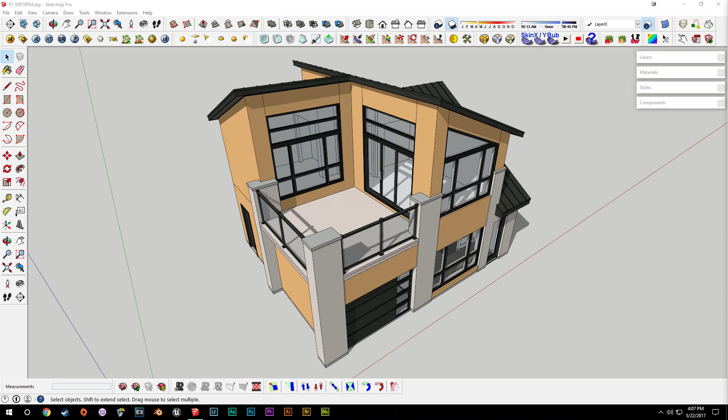Today we're going to shift focus from the first floor and move into the second floor and start working on some of the trim and doors upstairs. We can turn off the roof so we can get a look down into the second floor, and turn on blueprints to see what everything is like down here. We got a bifold, a couple of doors, and some sliding doors for these closets.

So we can probably get to all that today. I guess we can go ahead and add in this wall thing, since that wasn't added in before. It's almost about 2 inches - we'll just say 2 inches either side because it's not even.

Turn off our blueprints and get into the second wall here. Say 2 inches there, 2 inches here. You can just draw a line across the hallway and we'll keep it on the red axis. If you're having trouble getting it to stay on a specific axis, find a spot where it will stay on that axis, hold shift, and it'll stay there. We'll just drag it over here and click.

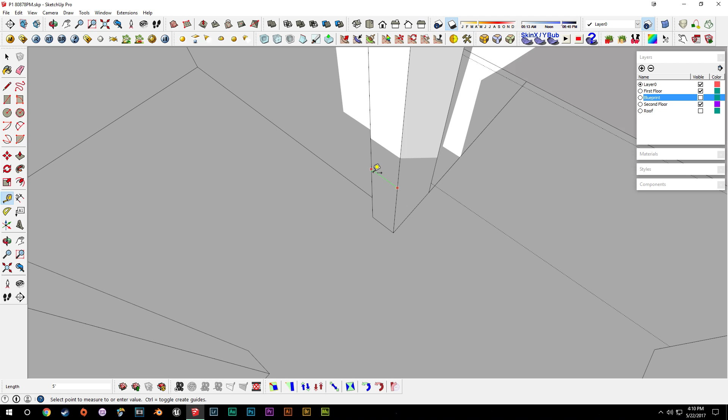I guess we'll get the wall thickness is 5 inches on that side. We'll just check the blueprint, see what it is - that's about 5 inches on this side as well, so I think that'll work.

Get back into the second floor component, draw our guide over 5 inches, and we'll just draw in some rectangles. There we go, delete our guides, erase that line. And now we can pull these lines up.

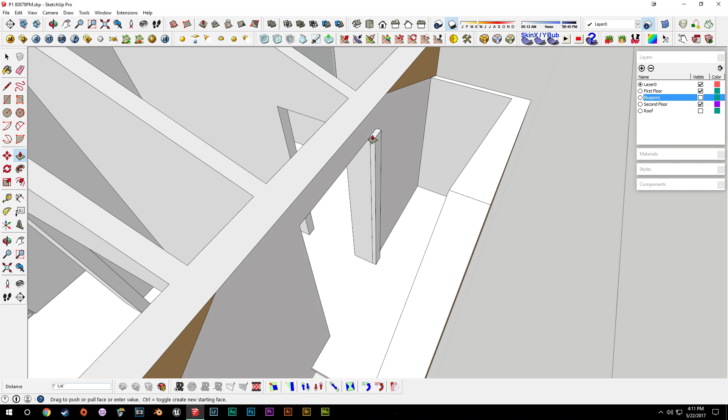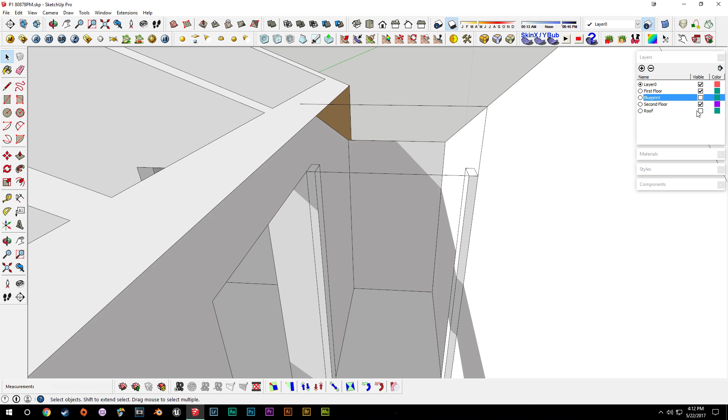We'll bring them up to about door height because we'll probably have a ceiling go across there, or a door top or something like that. We'll drag a line across there, drag a line up to here, drag this one across, hold shift, and drag it to there because this is where the roof meets that wall. If you turn on the roof layer, we can see where the line meets up there. Then we can turn the roof off again.

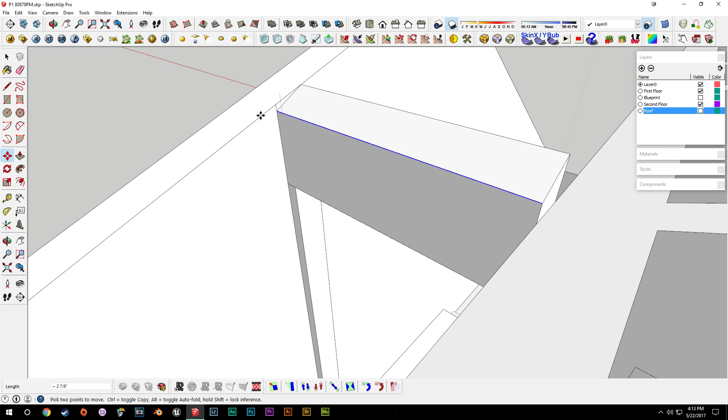We'll just draw another line on the back side here. We could pull it across - we'll have to, I guess we could just do that anyway. Pull it across here like that, and then pull this line down. We'll go to the move tool, hit M for that, and just try to drag it down so that it meets up with this particular face.

Not working out so great. We'll draw a line across here and use that as a reference point. Pull this down now and see if we can get it - there we go, hold shift and get it to match up with that line. You can erase that line now, and that one, and these here. Reverse that face.

We'll actually turn shadows off to increase performance a little bit. Again, we'll look at the blueprints, get out of this component, and just see - it does sort of match up with this particular door frame. So we'll go into here and erase that line there.

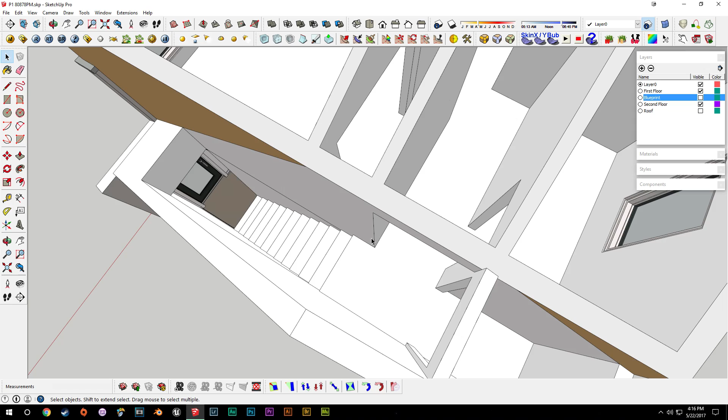Now we can get into doing the baseboards, and it brings up whether or not we'll have the baseboards go down the stairs. I guess we can do something simple - we'll probably just have maybe one panel come up and meet at the top and the bottom. So we can go down to the first floor component and get into the baseboard that's down here.

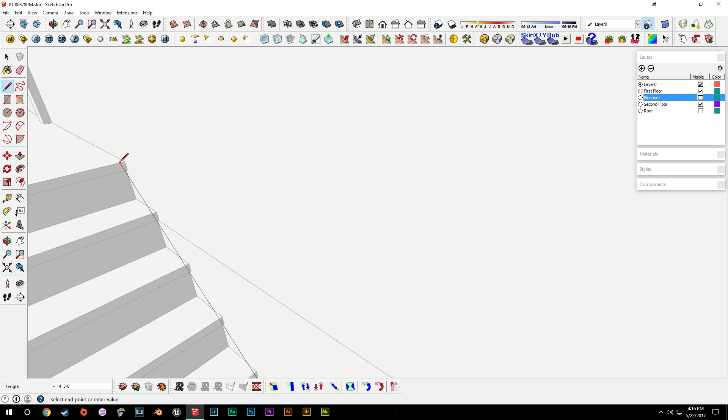We'll just draw a line from step to step, top to bottom here like that, so we have some sort of reference to go on. Now we'll take this line and raise it up so that there's some clearance, maybe even a bit further than that, say 2 inches.

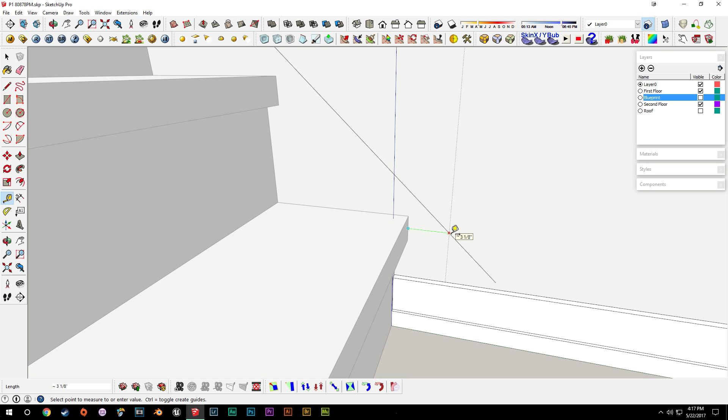Now we can draw a line from here on the green axis, the inference point of this line - we're kind of just extending this line. Bring it down to there and say 3 inches out from the step. Now we can delete this line and take this one and extend it down to here, just so we can get rid of that break in between, because when we pull it out, there will be an extra line that we don't need there.

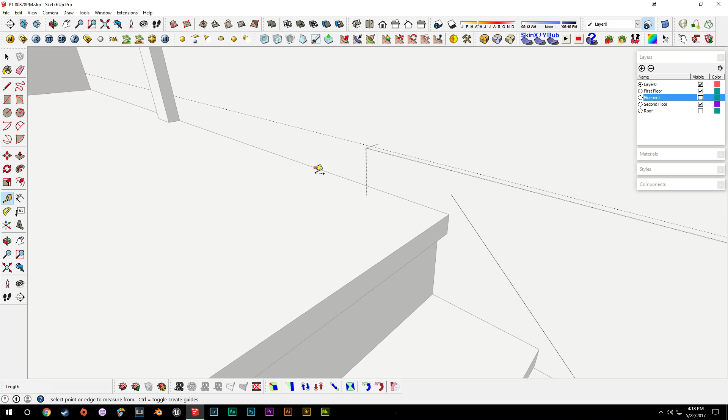And at the top here now, we'll say 4.5 inches, because that's essentially the height of the baseboard up here. So we can just draw this in on that inference point and draw it down from here where it will meet up with the actual baseboard.

You can erase that line and pull this one up to the top. Now we can go down to this part of the baseboard again. We'll go inside the wall and drag down a guide on this axis right to there. That says 9, so we'll say actually 11 inches. Then we can drag this line into here, keep it on the green axis, and pull it up on this guide to right above where the line is going to stop, and drag it up to there so that it will complete that face.

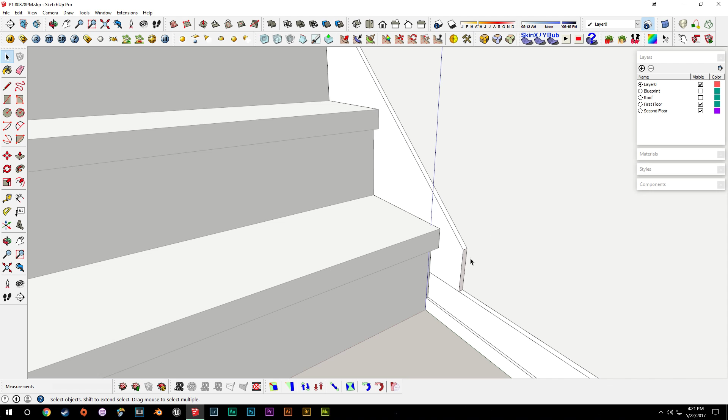We can delete our guides. And we can go back down to here again and just pull this face out the half inch that it is on that part of the step. Then we'll just take this face, say intersect with model. There we go, just so that it sort of combines itself with the stairs. We'll just see what this looks like. I think it looks okay, so we'll probably leave it like that for now.

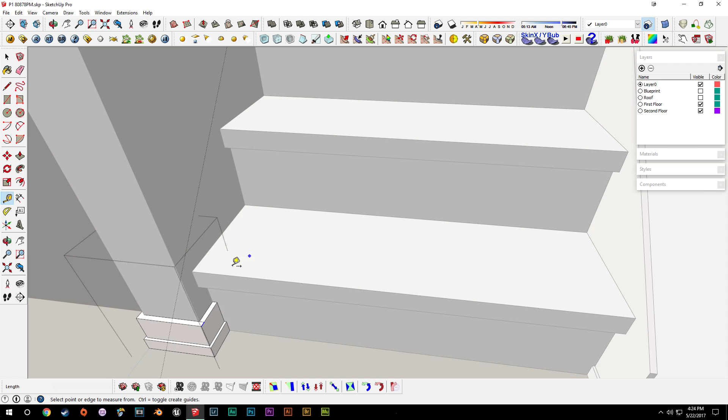And then we can go ahead and do the other side as well. This side is definitely a bit more abrupt, and that's really all we can do about it, but we can draw a line here, and then we can basically just drag this guide over to this wall, so we have an immediate reference point to that side. Just drag a line up to there, then drag it all the way up to here. Try and keep it on this line.

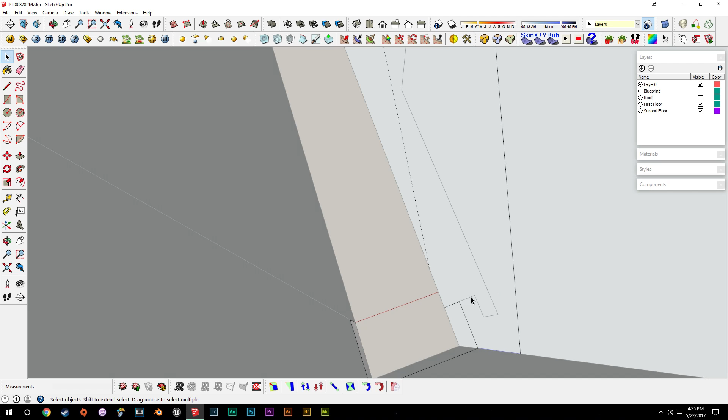And we'll drag another guide up 4.5 as our regular baseboard height. We can drag a line down here. We can go ahead from here on this point, drag this down 11 inches. And we can go inside the wall again. Drag this over to this line where it meets on the green, and then drag this all the way to the top of the stairs, right to where it meets the underside of this, right there.

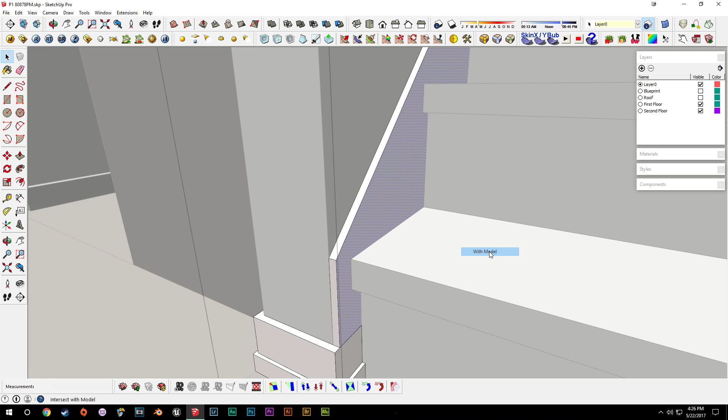I can drag a line straight up, make sure that this all fills in, and then same on this side. We'll pull it out half inch, and then just say intersect face with model so that it wraps around there. There we go, erase our guides, and that'll do it for the stairs for the most part for now, I think. We may come back to this, but I think that'll work.

So now we can get into doing the door frames before we start with the baseboards, and we can start figuring out some of our door frames, and we'll continue the same sort of dimensions that we did downstairs, and those were 3 inches wide, and they came out, I believe, 3/4 inch.

So I guess we'll leave that the way it is, we're not going to bother putting a door frame there. We will, however, put a door frame around this, because this will become a bifold door. If we just turn the blueprints on again, that is a bifold door. And if we just look at how much space we have there, that's 2 inches. So we'll say 3 there, 3 on top, and then we'll just go straight to the wall on that side.

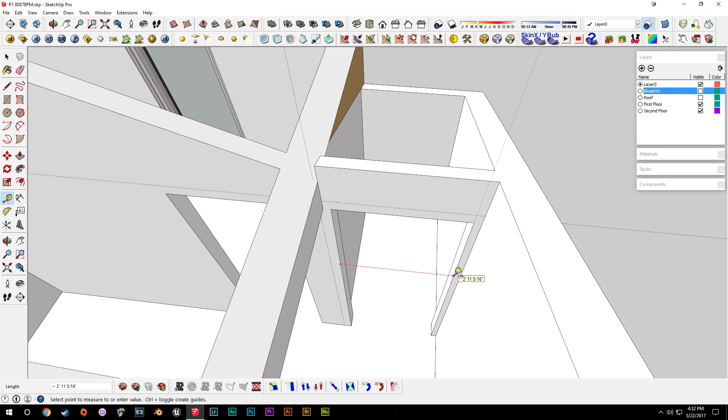In fact, let's just look at our door gap here, 2 feet 11 inches. I don't even think it needs to be that big. What we could do is maybe make this go over 1 inch that way, and then we could just have our door frame go right to the edge there, and then we could bring this out another inch, so that we have 3 inches on that side as well.

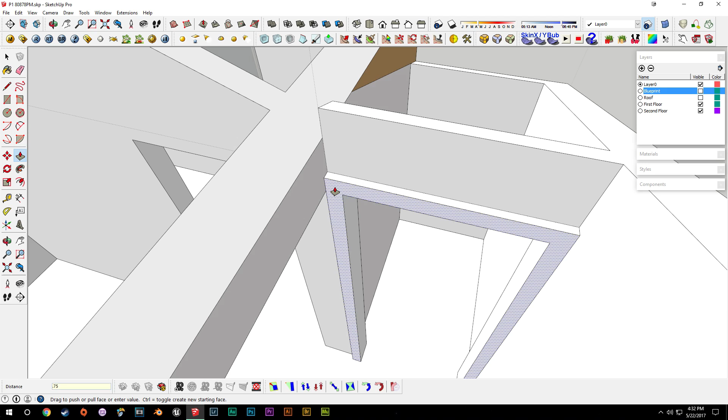We'll just drag a rectangle around here. We can erase that bottom one. Pull this out 0.75 there like that. There we go, and then effectively do the same for the inside as well. Get out of there now, erase our guides, and go back into this.

And we'll just look down at the door frame downstairs. All these came in, it was the door frame itself, so that was 1 inch, and then this came down 1/4 inch, and that went through to both sides. So we'll do the same thing upstairs.

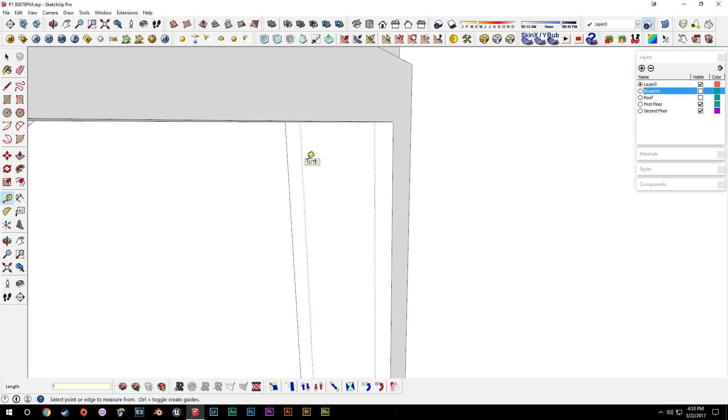So I'll go in here, 1 inch that side, 1 inch this side. Drag our rectangle down to the floor. Pull this over 1/4, 0.25. Same on this side, and the top, but we don't really need to draw guides in because we can just reference those 2 corner points. Pull this down 1/4 inch. There we go, erase the guides now.

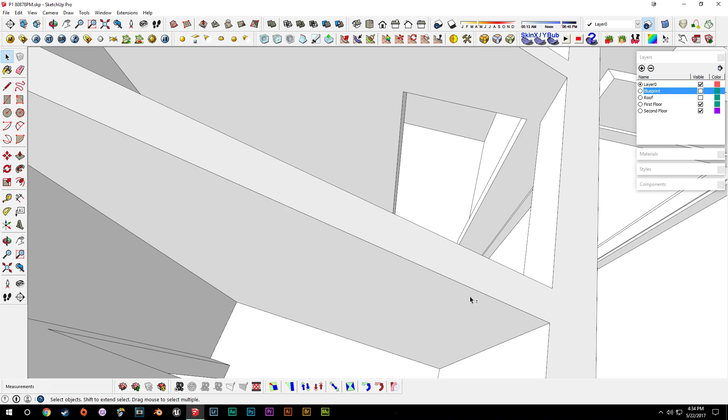And we can leave this gap here as just sort of an archway, we don't need to do anything with that. And then move on to this side, so we'll say 3 inches there. And that actually comes really close to the corner, but I think what we'll do is actually even it up so that it is exactly 3 inches like the other side.

We'll pull this line to there and check what our door gap is, about 2'6". That's okay, we'll reduce that down 1 inch. We'll do the door frame a little different this time, grabbing these 3 lines and using the offset tool to bring them out 3 inches, a different way of going about it, maybe a little faster.

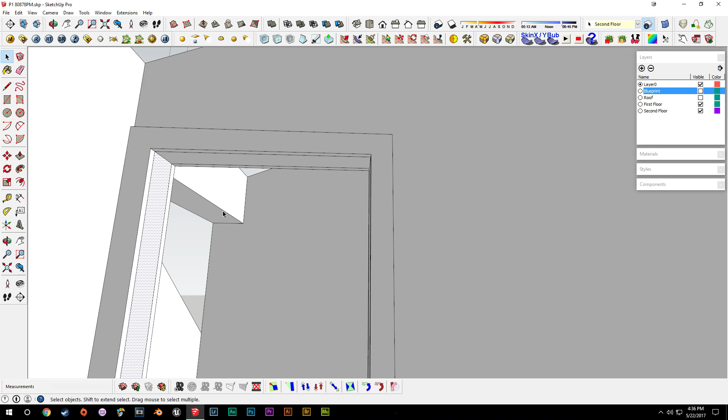Pull this out again, 0.75, and do the same for the inside. Now we'll do our 1 inch thing on the inside here again, drag these in 1 inch. Now we can pull these out a quarter. Erase those guides.

Now we can move into this window frame here, and we'll do the same thing we did last time. Grab these 4 lines and do the offset, 3 inches, pull them out 0.75, and we can just leave it the way it is. 2'7", it's a little bigger.

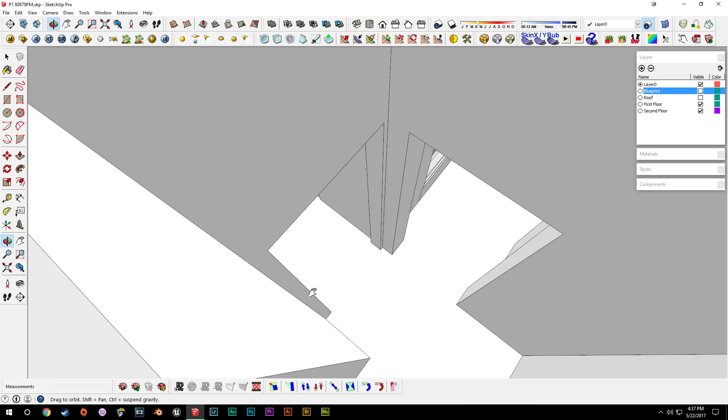2'6". I think what we'll do is standardize some of these door widths so they're a bit easier to place the doors in afterwards. So that's about 7/8, so we'll say exactly 7/8.

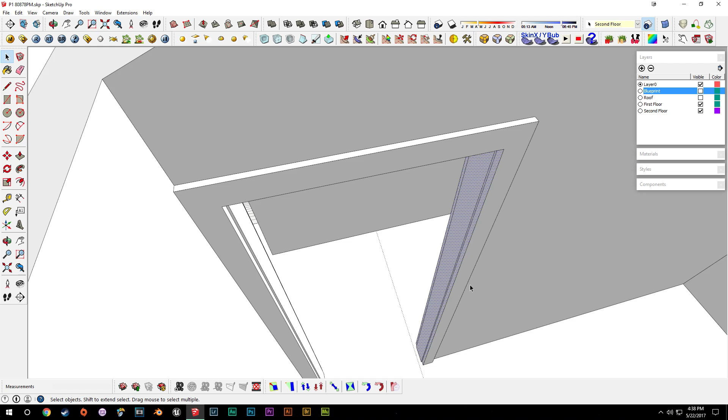So we'll grab these lines here, and rather than pushing and pulling each piece, we can grab our move tool and drag it over 7/8 like that, which reduces the gap down. We'll try to do that for all the main doors so we don't need to keep changing it. That was for the bathroom door.

The larger storage room door here - well, we'll just check the gap actually. The gap was 2'6 1/4, so we'll use that for the bedroom doors.

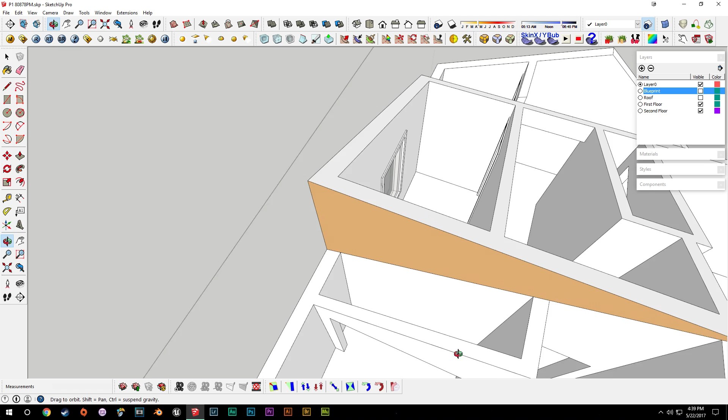We'll draw on our frames first and adjust that afterwards. We'll offset our 3 inches there, pull this out 0.75. This door frame is actually particularly thick, I guess because it's on one of these exterior walls, going across here, so we'll leave it the way it is.

It doesn't particularly matter, it just means there'll be more negative space on one side of the door than the other. We can go in and drag in our rectangles, drag this across, then bring all these out 0.25.

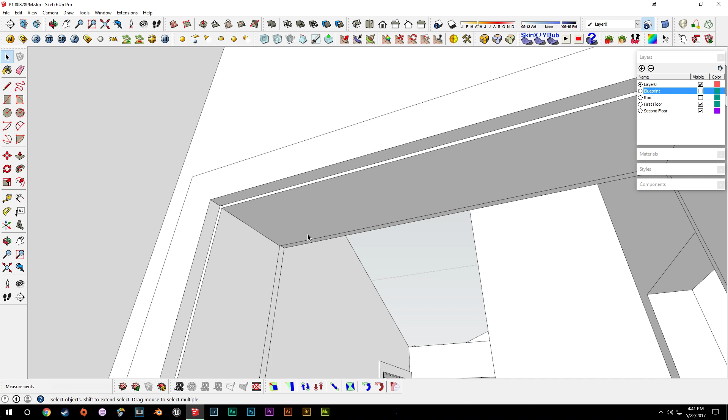We'll do the sides first and then the top so we get that line that's consistent across the top here. Now we can check our gap, and the gap is 2'7" and 1/8.

So we'll try to pick a side to pull it in from - we'll do it from this side. We'll drag it over to 2'6" and 1/4 right there, and that's about 7/8 as well.

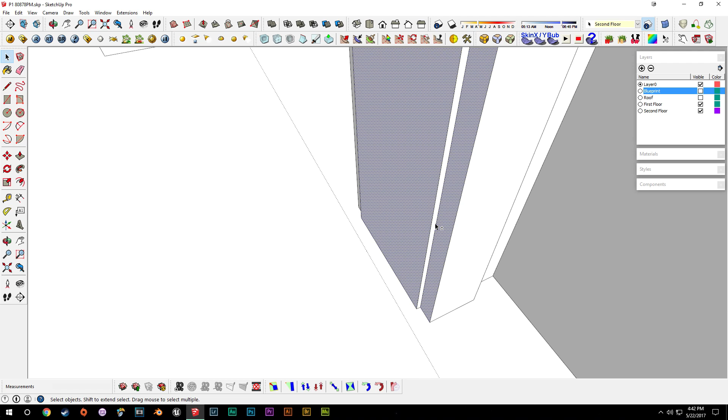So we'll grab all these faces that we got to pull over, select all those, and then pull them over 7/8. We can probably erase this little line here while we're at it, we don't need that - erase that on that side as well. Now that door frame is done.

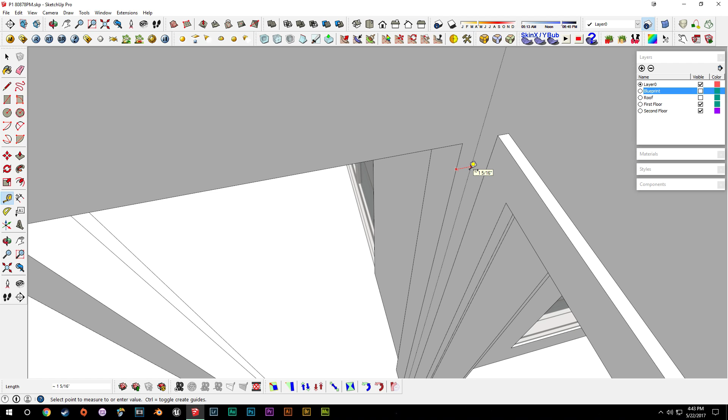Now we can see what's going on with this one. It's our gap here on this side - it's not even 2 inches really. We have about 3 1/4 on this side.

What we can probably do is pull this out 3 inches and then push this in 1/4 inch, pull this side out 1/4 inch. This will all be adjusted afterwards once we finalize the door width, but we'll just leave it like this for now.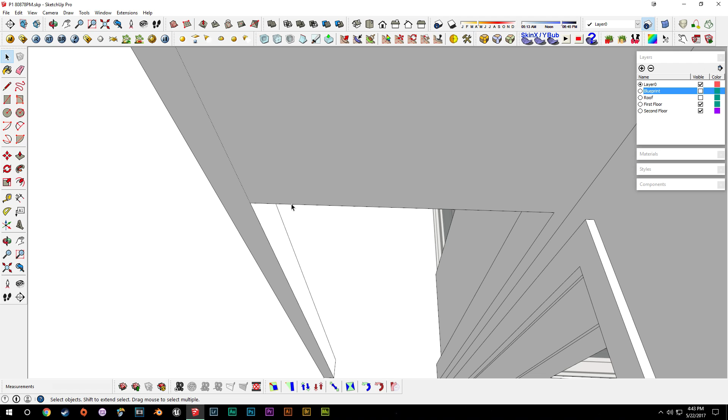So we'll just drag a guide up from here. We don't really need to do any more guides, because everything is up against a wall. Drag this out 0.75 and swap to the inside of the door frame and do the same thing, then start pulling these in 1 inch from either side.

Maybe what we'll do, just to make this door frame equal on both sides, is go into the closet here and drag this down about 1 1/4 inch, which is what we'd need. We just measure this door frame here, it's about 1 3/4 across, so we add another 1 1/4 inch there - we can make that 3 inches.

So we can just see if we can pull this in 1 1/4 inch, say another 1.25 right there. Drag a line across here and delete that, then we'll need to draw that down to the floor. Drag it across to there and drag it back up again, so that fills in.

I can erase that line and this guide, then drag this line down both sides so that it cuts off this one to there, and then to there. For this one we'll push it into the wall to there and then to there, because it's getting caught up on that door frame piece.

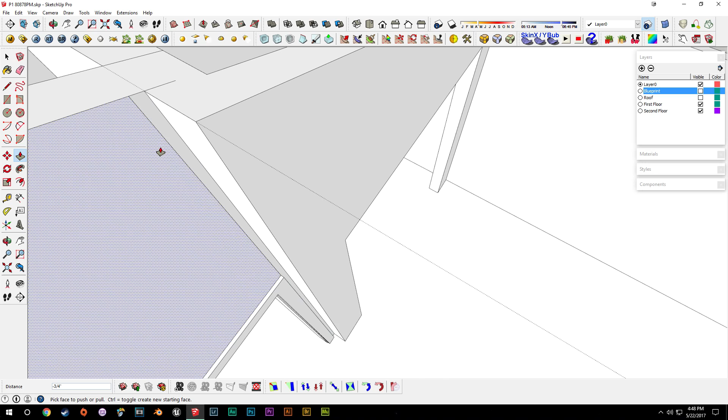We'll do the same on this side. Draw a line out to here, draw that to the floor, then push this in and then in again. Erase that and these guides. There we go. Normally this sort of unequal door frame thing isn't necessarily a problem.

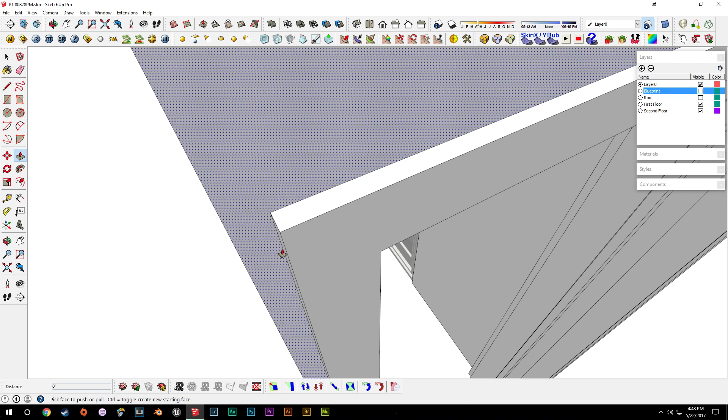But when you're rounding this corner, it's definitely more visible that it's narrower on that side than this side. So just for visual purposes, not a big deal, but to keep it consistent, move this in. Grab all these faces like before, and push this back to the wall. Grab the move tool and pull it back right to the corner. It's about 1 3/16, but that's fine.

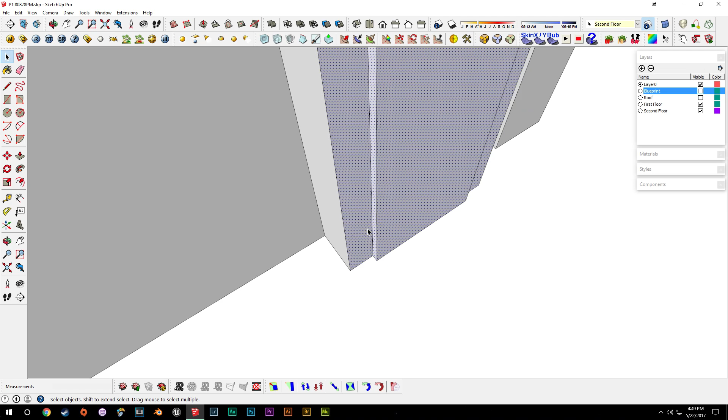Now we can grab all of these pieces - there's no back, so we don't need to worry about that. Just grab these faces and pull them out 1.25. There we go. Check this measurement now - it's about 3 inches. That's good. And we'll just check our gap.

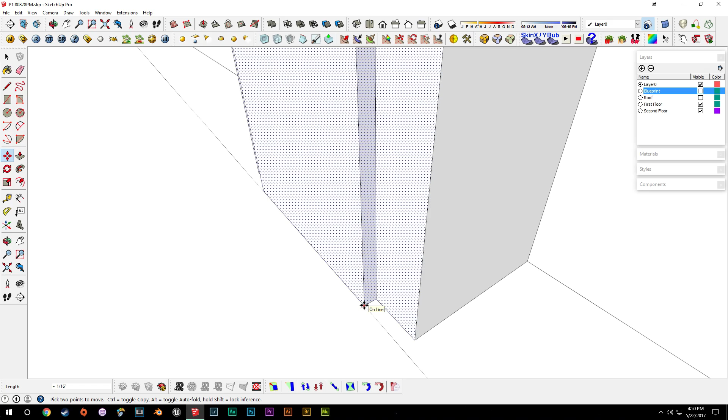With our 2'6" and 1/4 measurement, it goes to about there, so it's actually a little bit tighter than some of the other doors. What we can do is grab all these front faces and pull them back to there - it's only 1/16 inch, so it's less visible than before. Rather than cutting the closet up again, it's pretty close, so we can leave it like that. That's also on the inside, so it's less visible.

Now we can move on to the interior window frames here. Let's grab these 4 lines, go an offset 3 inches, then pull them out our regular 0.75. We can do the same for this door slash window frame combo - pull that out 3 inches. There we go, that's that one.

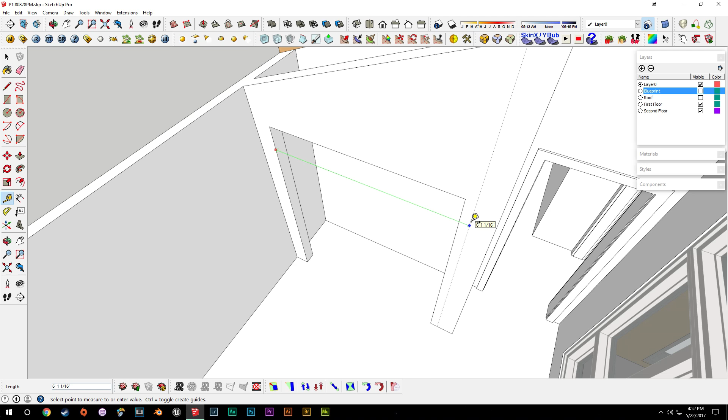Now we can move on to the closet, and we'll want to make sure both of these closets are the same width. One's 5'9" and 7/8, this one is actually 5'9" and 13/16. So how about we just say 5'10", and we'll do that for both of them. That way when we get into doing the doors, we can just copy and paste rather than fudging the dimensions around again.

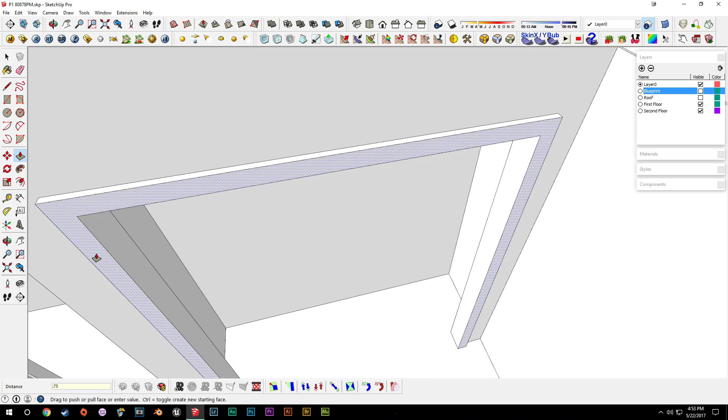I'll pull this one from this direction, 5'10". Pull that over to there, delete that guide, and now we can do the frames. Grab this here, 0.75. We probably won't bother with the insides for now, although we may end up doing baseboards for the inside, so I guess we will just do quick frames here, just in case we decide to do something with that later on. It's already done, and we'll do our same 1-inch thing here for these as well.

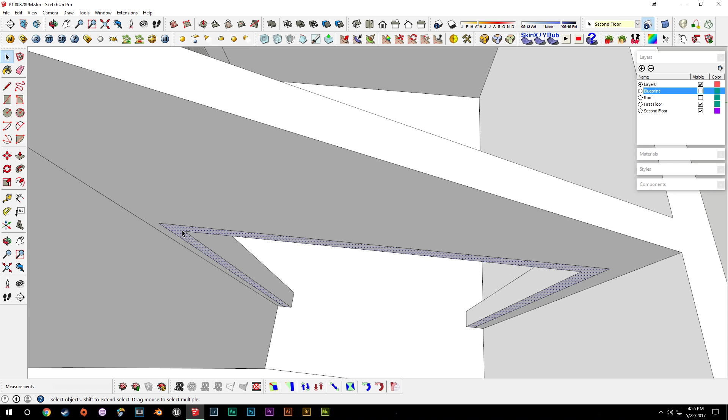In retrospect, if you have a lot of door frames and things throughout your model, you could probably just make those into groups or components. Especially with a lot of them being different dimensions and having to be reworked, it's probably just as well that we made the frames on them while we were changing their dimensions.

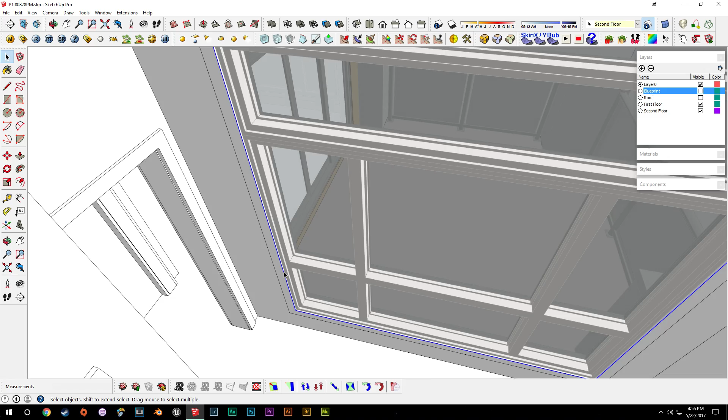Now we just have this window to do. We'll grab these 4 lines and then we can start moving into the baseboards. Pull this out our 3 inches. So that's all the windows and door frames complete, and now we can move into doing the baseboards.

We can start at the top of the stairs with the same pattern that we have downstairs. We'll click into the second floor here, drag our guide up the 4.5 inches to the top of that, then our 1.5 inches to there, and then trace this line out here that comes down to there, goes down 3 inches, then comes out 1/4, then goes to the floor, and there we go.

That's that piece. So now we can delete our guides, click this, we'll group it - doesn't really matter what the number is - and then just pull it across to here, like that. And there we go, that's that first piece done.

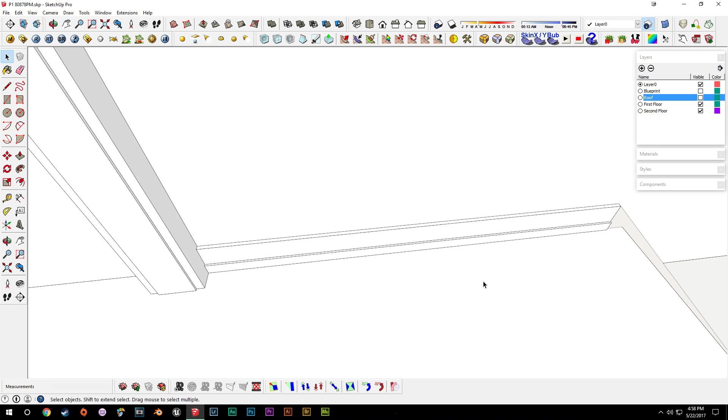Now we can move into doing the inside here. Like we did downstairs, rather than making this into a component, we can just grab the end piece and go up to make group.

With the group function, you don't need to keep hitting make unique on it. You can just copy and paste it, and it doesn't mimic other groups. So we'll draw a line around the base here, grab this piece, and wrap it around our line like that. There we go.

Push that to there. Go in here and pull this one across like that. Go ahead and rotate this one 90 degrees, and put it there.

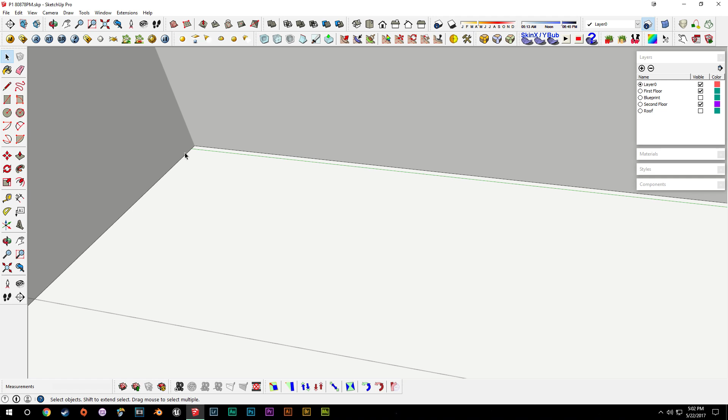This one goes on 2 walls, so we'll draw a line in like that. Grab these 2 lines, follow me tool, and click the face. There we go.

We've got a short one to do here. We can do 180 degrees, paste it right in the corner, pull that across. It's a very short one, but still needs to be done.

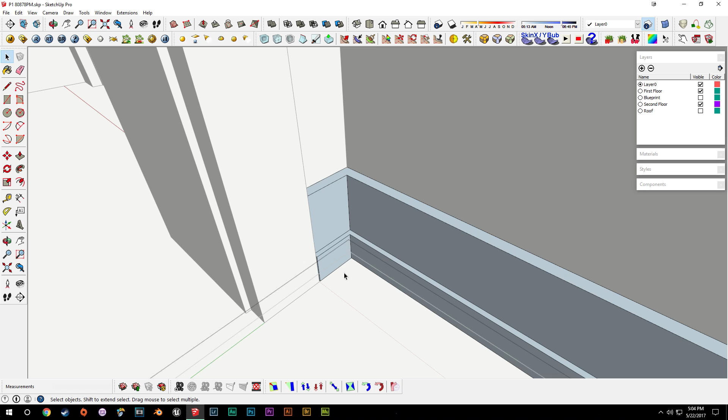Grab all our lines, and with the follow me tool, click our face. Of course it wrapped the wrong face, but that's not a huge problem. Just triple click everything and reverse our faces with the hotkey. If you don't have a hotkey mapped, you can right click and say reverse faces.

Move over to this one. And if you'd like to set up a hotkey, you can do that as well. Go up to preferences, then shortcuts, and scroll down to where it says edit item reverse face.

You may need to have the object selected and the function available before you can see it in this list. Scroll down to reverse face and you can assign or add a shortcut. You can add multiple shortcuts for specific things if you want. Then just hit OK. I'll hit cancel here because I already have it assigned.

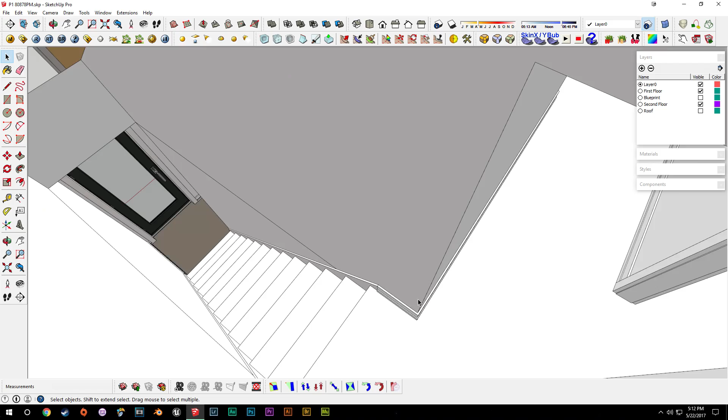We can pop out of this, drag that one to there, and start working on this one. Reverse those faces, wrap it around to the top of the stairs there, and grab these 3 lines. I can click that with our follow me tool and it wraps around there perfectly. There we go, so that does it for the baseboards.

So now we can start dragging some doors up. We'll go hide the second floor. We have a lot of these baseboard pieces that are not part of the second floor yet, but we can deal with that after.

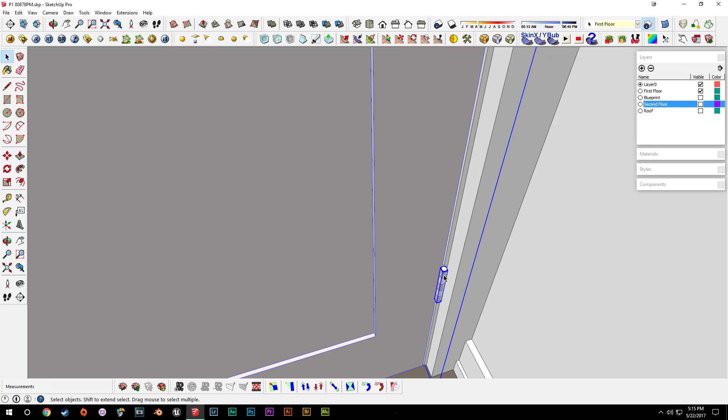We'll grab our storage door and make sure we have the pins and hinges selected for the top and bottom. We'll make a group of this for now, a temporary group, copy it, enable our second floor again, and paste this here.

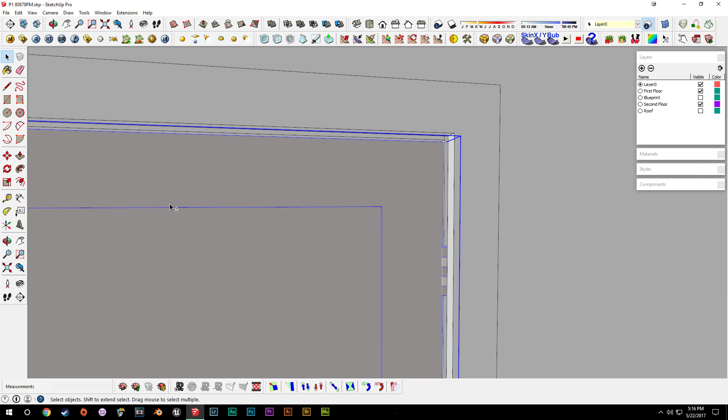Then we can drag them right into the corner here of this molding piece, and drag them over 1/8 and down 1/8. That should fit them in there relatively well.

I'll actually have to push this one over a little bit further so it matches up better. Now one thing we remembered to do downstairs, since it was still fairly new, but forgot upstairs, was to adjust the heights of the doors.

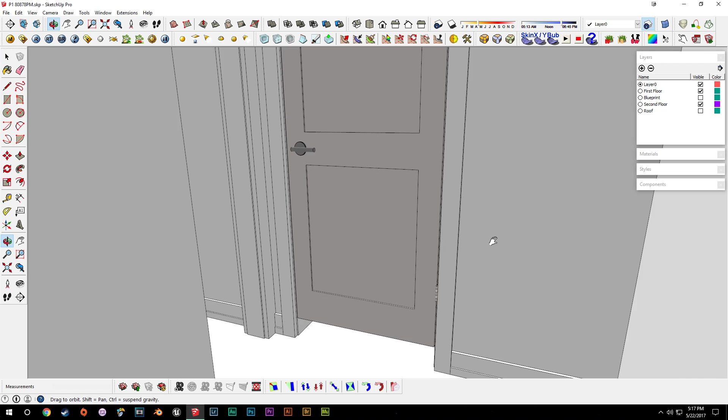We did adjust the widths of the doors, but not the heights. So we still have the temporary heights we'd picked before, which isn't a huge problem since we'd have to adjust them anyway.

We can drag these down essentially to the floor, right to where it snaps, and then drag them up 1/8 of an inch. Then we'll go into the second floor model, drag a guide up 1/8 of an inch like that, and figure out what the measurement needs to be.

It's 4 1/8. So we'll grab all these faces on the top here and drag them down 4 1/8 like that. Then we'll go around and make sure all the other door heights are the same. That actually works out fairly well for this one because these two are no longer touching the bulkhead there of the archway.

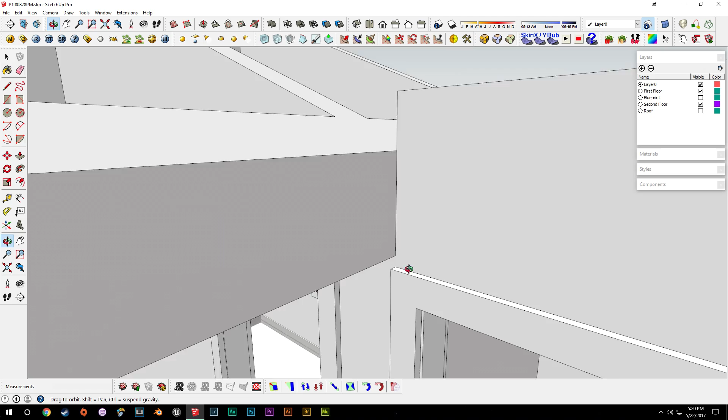They're around 1 inch, 1 1/8 below the bulkhead, so that's pretty good now. I'll drag it down our blue axis there, 4 1/8. There we go, so that's all the door frames corrected.

So now we can get back to placing our doors. On this one, the door actually opens inward, and I guess that makes total sense.

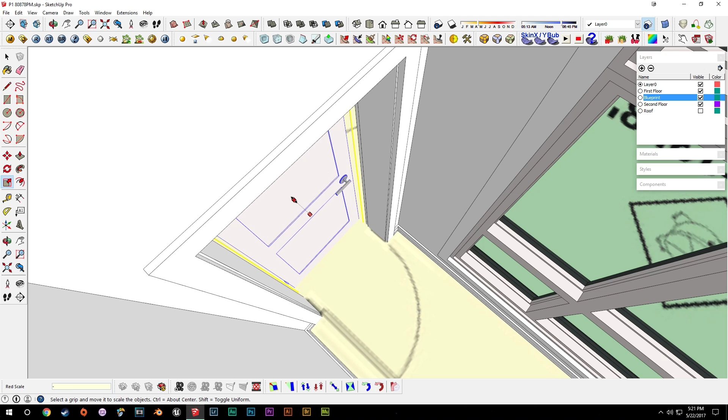So what we'll do is grab our scale tool and do a -1 so that the hinges are on the inside. Then drag this through so it meets up with the inside of the door. Turn off our blueprints and drag it over to make sure it's on the right plane. Looks pretty close. Turn on our blueprints again, paste another door, and rotate it 90.

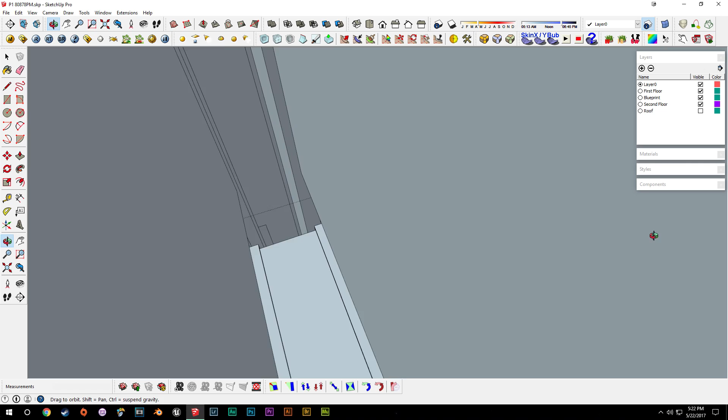This one opens in as well, so we can pull this door right into the corner, effectively pulling it out until the hinge matches with the door frame there. Pull it down 1/8 and see what it looks like on the other side. It's pretty close, but that'll work.

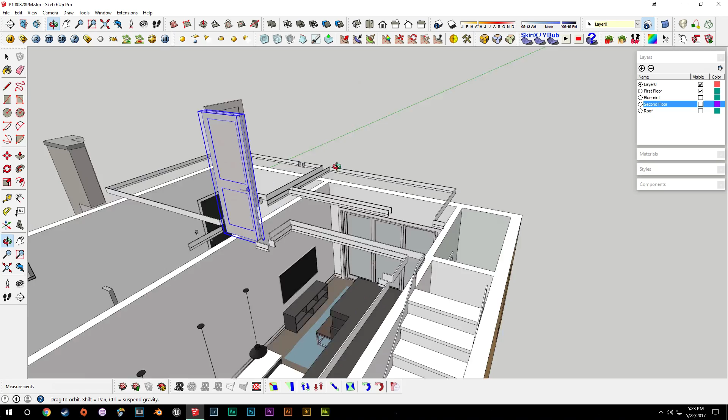Turn the blueprints off to see what it looks like on the bottom. It looks pretty good as well. So now we'll turn off the second floor, and while we're here, make sure all of this stuff is on the second floor.

Now we'll grab our bathroom door, since this one is a little bit narrower, and make sure we get our hinges on there as well. We'll make a temporary group for this one, copy it, turn on our second floor and paste it up here. We'll toggle the blueprints for a second to see which way it opens, and it's in, so we can rotate that 90, then turn the blueprints back off again.

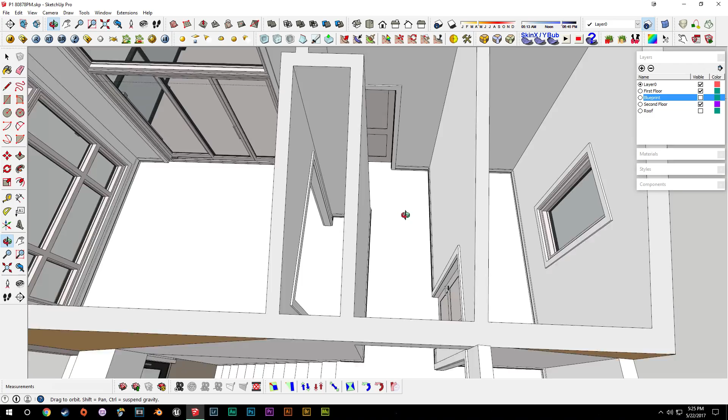Bring this over to the corner, pull it out just so the hinge is visible there, then do a -1 scale so it's on the inside. We can drag it back out again. So that's the 3 main doors upstairs, and now we can move into doing the sliding doors and the bifold door over here.

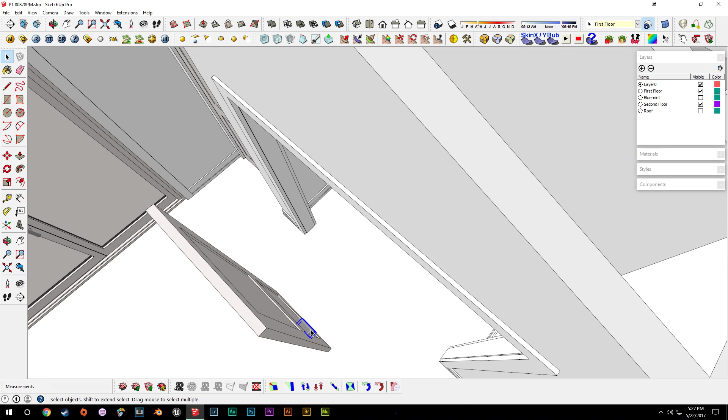I think for the sliding doors we'll actually just use the main doors again, but of course we'll take them apart. We can hit explode here, take the hinges off, and there we go—we just have our base door. Get rid of the door handle there as well, and now we can bring them into here.

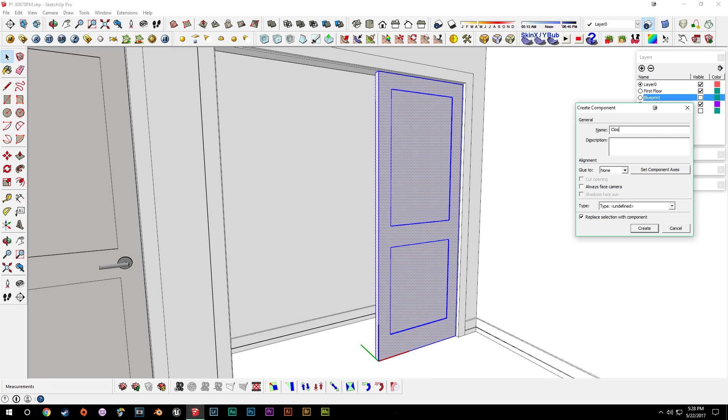We'll turn on the blueprints really quick to see which one overlaps with which. The one on this side is the one on the outside, so we'll drag this over to here, down 1/8 and then over 1/8. I think we'll hit explode on this so we can get our base component again and regroup it. We'll call it closet sliding door, so we can modify this without changing the actual door itself.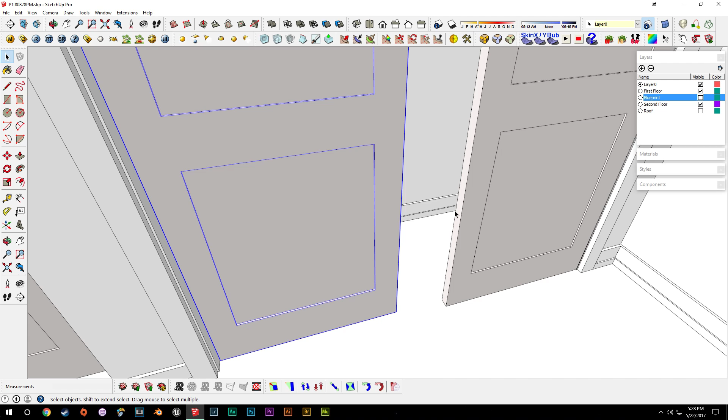Slide this over to here, and we'll bring it into there just to see where it would need to line up. Drag it in further 8, and drag it over to this side of the frame—that's basically 9 5/16. Pull it off there 1/8 of an inch, so this now is effectively the gap that we need to reduce.

What we'll do is a -1 scale on this, which you'll see the reason for in a second. Now we can just go in here and start pulling it. Because we reversed it, it now overlaps with itself. If we hadn't done that, it would just start pulling off this side and disappearing into the wall. But now that it's reversed, we can see exactly where it needs to line up and how much further we need to pull it over.

So we can say maybe about here, maybe 5 inches, which gives us a little bit of overlap. It's not a lot, so maybe we'll bring it out another inch, or even just half an inch—say 0.5, so that's 5.5 inches. Then we can bring this panel over as well, 5.5. Even if it were to overlap with the panel itself, we could pull this over maybe another inch and pull these in an inch, so that'd be basically 6.5 inches. I think that looks pretty close to what we're looking for.

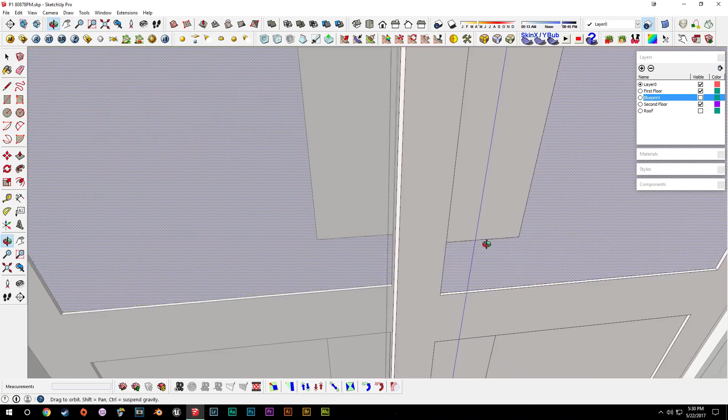That'll work. We can move to the inside of the door, pull these over 6.5, and just erase these inside lines. That'll do it for how the closet will work. Now what we can do is go in and draw in a track.

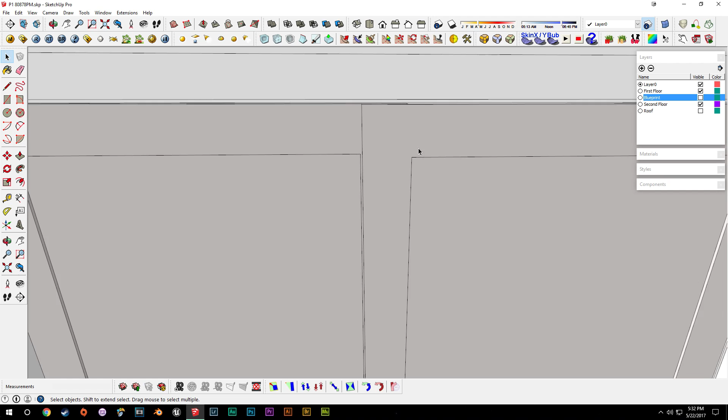We can probably reduce the height of the door, top and bottom. So we can go into this, and it's already 1/8 of an inch. Maybe we'll make that closer to 1/2 of an inch. So we'll just go in, we'll say another 1/4 of an inch.

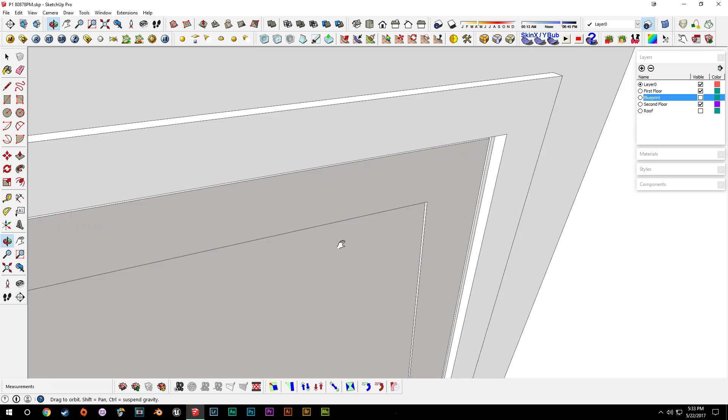So that'll make it 3/8, just a little bit smaller than 1/2 of an inch, on that side. And we'll do a little bit differently on the bottom. We'll bring the bottom up 1/8 of an inch. And we just need to see what our door thicknesses are at 1 5/8 inches. There's no real gap there, is it?

What we can do, we'll just grab both of these doors and we'll drag them in 1/4 of an inch, say 0.25. Maybe even further than that. We'll say another 0.25, so that's 1/2 of an inch now.

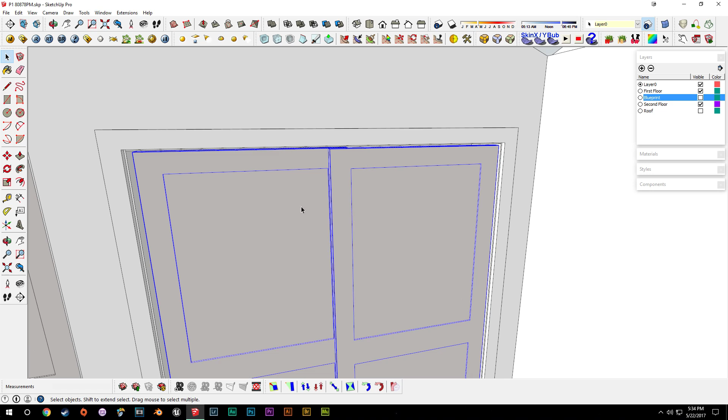And what we can do, we'll go ahead and hide these. And then on the outside of the second floor group, we'll start drawing in a rectangle. So we have 1/2 of an inch, say 0.5 there. Then it's 1 5/8, that's that door. And then we have 1/8 of an inch gap in between. Then another 1 5/8 for the other door. And then we'll say another 1/2 of an inch, like that. So that'll be essentially our frame that we're looking for.

We'll bring this down, say 1/8 of an inch, and then this down, that'll have to be 1/4 of an inch. So we can just go in, draw this in, draw that in on top of it. And then we can just bring this in 1/8 of an inch for that track, 1/8 inch there. And with all these 1/8 inches, we can just sort of draw in middle tracks like that. Erase these pieces and our guides as well.

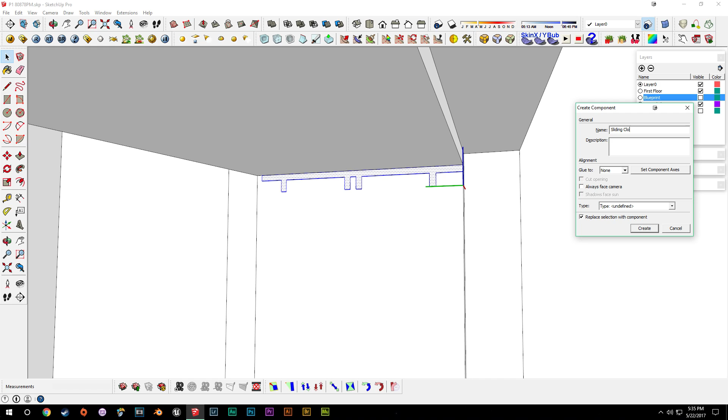And so we can now group this, we'll say sliding closet door top track. And then we can bring this to the bottom and say -1 on it, like that. And just go in and pull these across to right there.

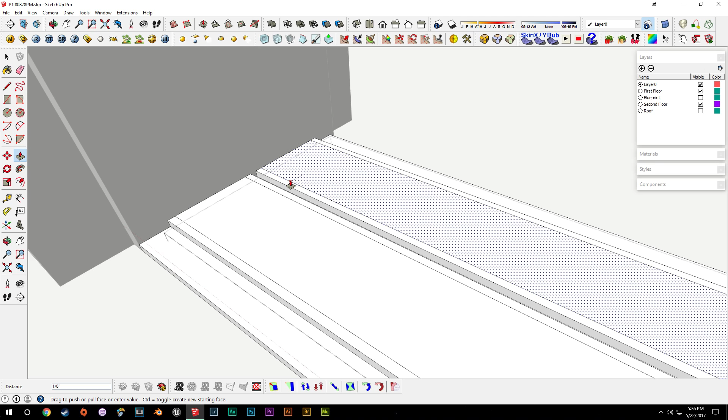And while we're down here, we can say make unique on this one and pull these down 1/8 of an inch, like that. And we'll actually pull the middles up on these ones, and then maybe bring the outside pieces down 1/16. There we go.

And we can say we'll go up to edit and then unhide last. That'll bring our doors back. And now we can just copy the bottom track, copy those 2 doors, and then the top track.

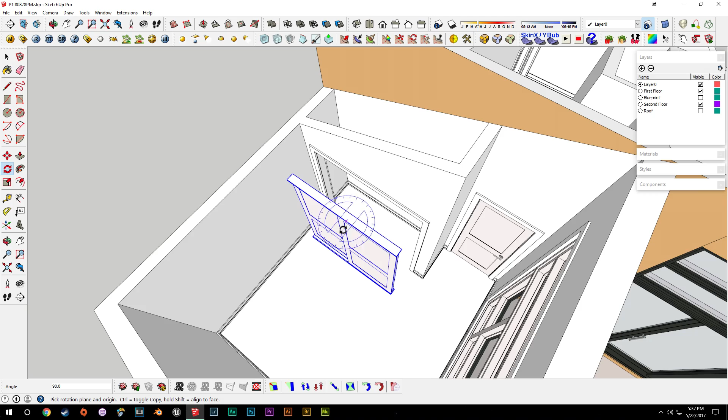Bring it over into this room, hit paste, and we'll just rotate it there and make sure that we know what door is supposed to be on the outside. And that's of course on this one now. And say -1, rather than rotating it 180 degrees, because the track is a little bit differently spaced on both sides. Drag it into the corner there like that, and there we go. And that will do it for that closet door.

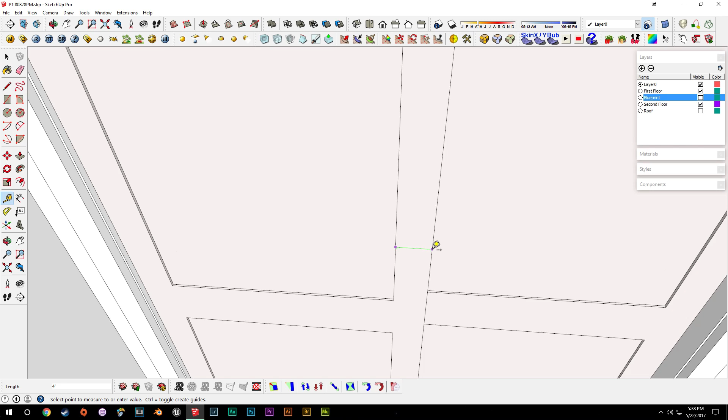And maybe we'll actually sort of shorten the width of these doors, and maybe just make both of these visible. Maybe what we'll do, this is basically 4 inches wide here, so we can probably pull this back 2 inches, like that.

Except the problem now is, so the inside one is visible, so we can just hit make unique on this, and then maybe pull this over an extra inch, like that. And then pull the inside panels over 2 inches as well. And we'll just see what that looks like.

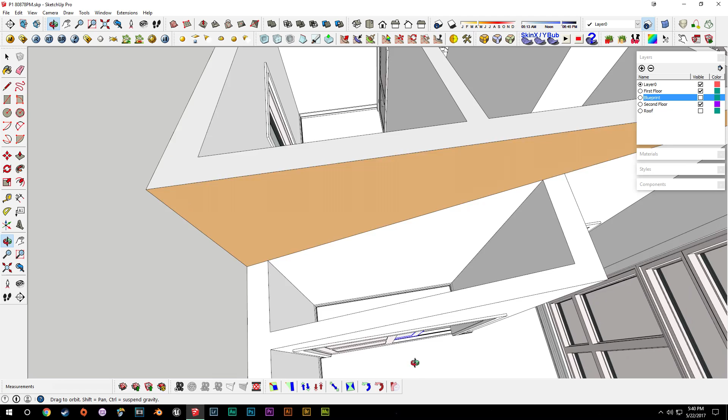Yeah, maybe we'll stick with this, just to make the doors a bit narrower, especially when you decide to slide these over, it gives you sort of a wider berth to access the clothing and whatever was inside. And especially with the door being 1 inch longer, if you were to slide it all the way over to the frame, it gives you a little bit of an edge where the door would actually stick out a bit further for you to grab onto it, and of course slide it back over again.

And of course now we'll actually have to go over to this closet, because we made the other one unique, and drag this one over 1 inch as well.

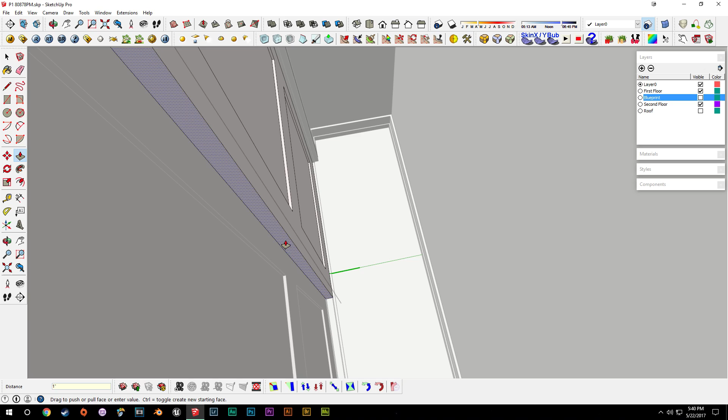And that about does it for all of the frames, baseboards, and doors, apart from, of course, the bifold door that we have here, and I think we'll actually go ahead and do that next time. So that'll close things up here.

Definitely more of a basic episode, but all things that definitely need to be done before we can get into the grittier stuff on the second floor, which we'll hopefully get into next time. And that'll be some of the furniture and stuff, maybe the bathroom.